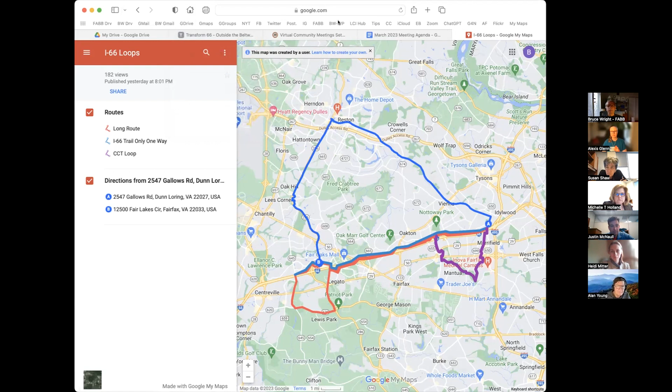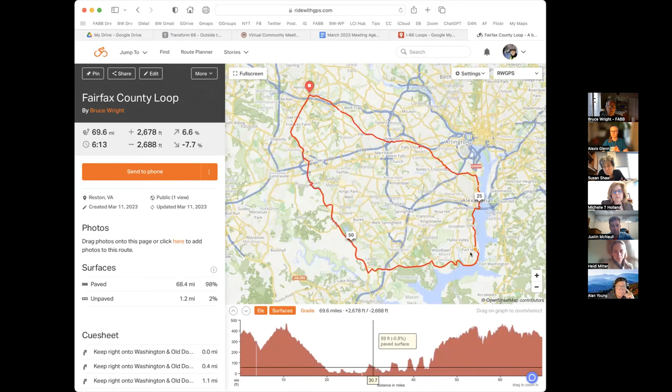Let me get back to my agenda here. The bigger 70-mile loop that includes the Mount Vernon Memorial Highway trail, when that opens, covers this segment right down here up to Route 1. That's going to include Route 1, Lorton Road up to Route 123, up to Fairfax County Parkway, up to the W&OD Trail, the 4-mile run trail, and I think part of the Custis - no, I don't think it does the Custis - and then down to the Mount Vernon Trail. So these are critical links that are being finished off. Anyway, those are coming.

Fairfax County is also conducting the Gallows Road corridor multimodal study, and we've got a couple of folks from FABB looking into that. Gallows Road is a key north-south link that is just not bike friendly, especially across the Beltway near Inova. We hope there will be a bridge over 495 along Route 50 that'll connect with Gallows Road, and then that whole Gallows Road corridor needs to be more bike friendly. So with that, let's go right ahead with the I-66 parallel trail presentation. Susan Shaw is the Megaprojects director.

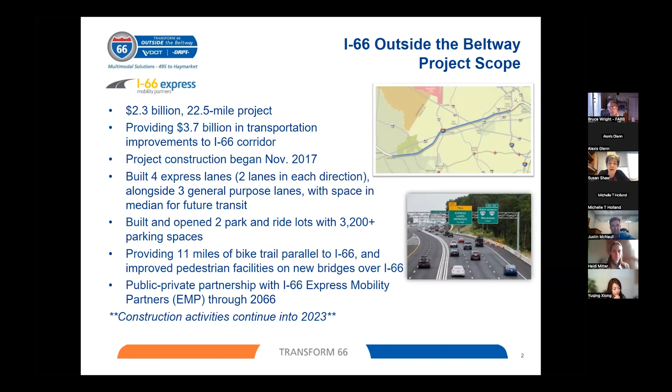In terms of the shared use path, on the next slide, that's our big map of what we've been doing. 11 miles of trail that we're building, and you might recall that we're partnering with various groups along the corridor to implement some elements of these trails where the right-of-way was constrained, or there were constraints immediately adjacent to the corridor.

We are anticipating kind of a segmental opening. So as safe, usable segments of the trail are completed, we'll be looking to open those and make them available. And in addition to the trails along 66, we also have improved pedestrian facilities on the new bridges that have been constructed as part of the project.

Susan, I just rode from Merrifield to get back here and noticed that the Cedar Lane trail is paved on either side. It was just really rough rock. So that was fantastic to see that. Now the county just needs to pave the rest of that up to Cottage, but good job there. Good. Yes, I mean, we'll hope to just keep ticking off more of those as we move along.

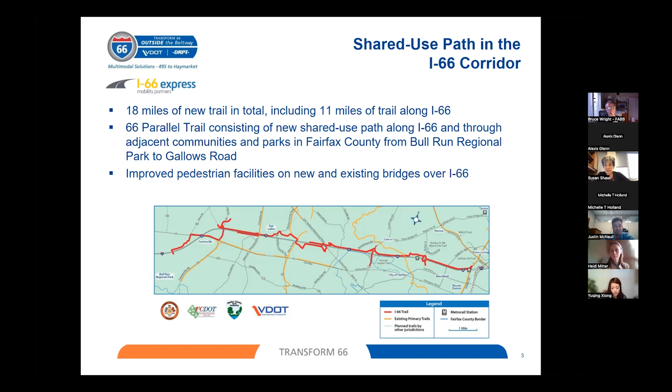So some of these are being, and you'll see on the next slide, Bruce and I are covering what is being included with the Transform 66 project proper. And then Heidi is going to cover some of those projects that are being delivered either outside of the project by VDOT or by others. I think Yuqing has some information too about areas where the county or Fairfax County Parks are doing some elements of the trails. And so you can just see that these are the main sections that are being done within the project, all the interchanges, the sections that we'll cover.

We also have a piece along Fair Lakes Circle that's still being worked on, an area of Compton Road that passes under 66 on the west end of the corridor, and then some trails along Braddock Walney Road and into the EC Lawrence Park entrance there.

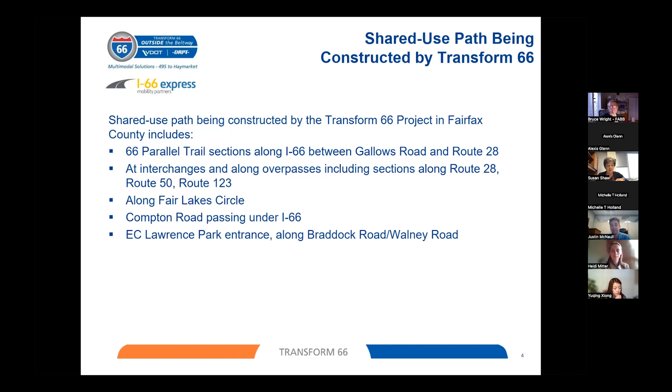So with that, I think I'm going to turn it over to Bruce, and he's basically going to start at the east end of the corridor, and we're going to work our way west. We'll talk about what we're anticipating to open. We split this into what would be available by mid-May opening, and what's after mid-May. As elements are usable and safe segments are available, we're going to open them, so you may see some stuff opening before May. That's what we currently anticipate, but that's how we split it up for this presentation.

Thanks, Susan. So as Susan mentioned, the next 12 or 13 slides are really kind of walking through the corridor that's part of the 66 parallel trail. We've color coded it: the elements in green are expected to be open by May 19th, the Bike to Work Day, and the orange are items where we're still working on different things that may delay that. The dashed lines are sections outside of the 66 project - that would be existing facilities already out there, other projects being worked on, which Heidi and Yuqing may go into more detail on later, and then future connections that will be built later on.

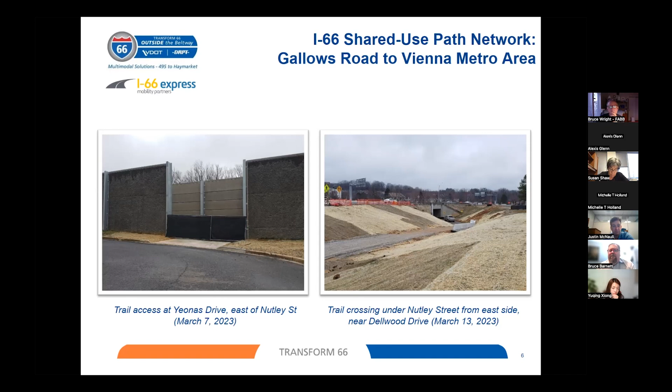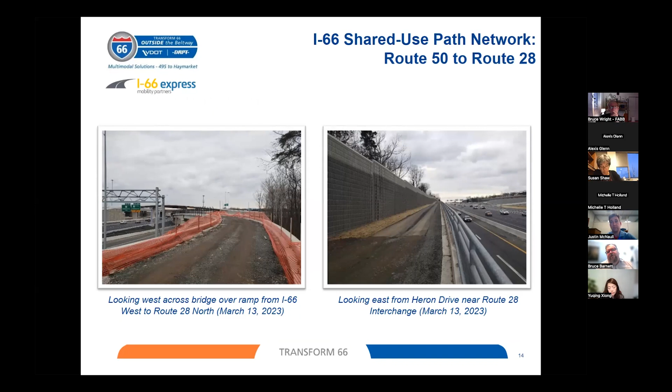If you go straight, you would continue on to the Braddock Walney Trail. If you go to the right at the split, you would cycle around and loop back up and over top of 66 to be able to go south towards 29. Again, it's all grade separated.

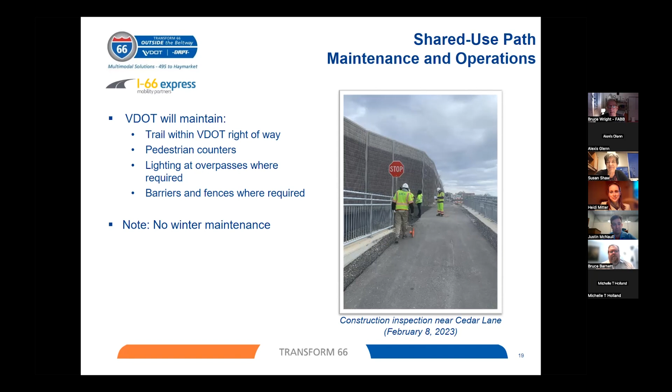All right, and let's see, the next slide is on the non-motorized traffic counters, and those are the locations that we've identified. And so that will provide information that, I guess, this will go to Heidi.

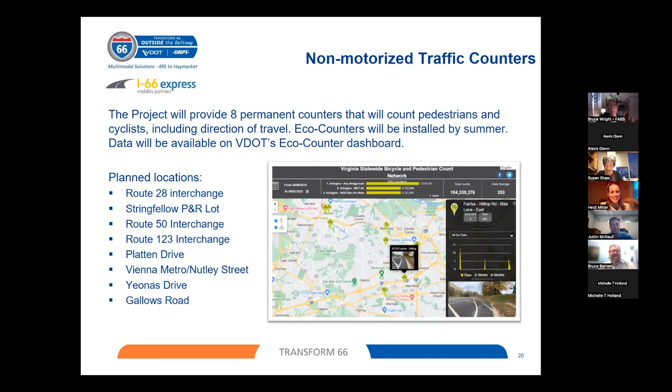So, and I don't know what she'll do with it, but we will know how many people are out there. And so with that, I think I'm going to turn it over to...

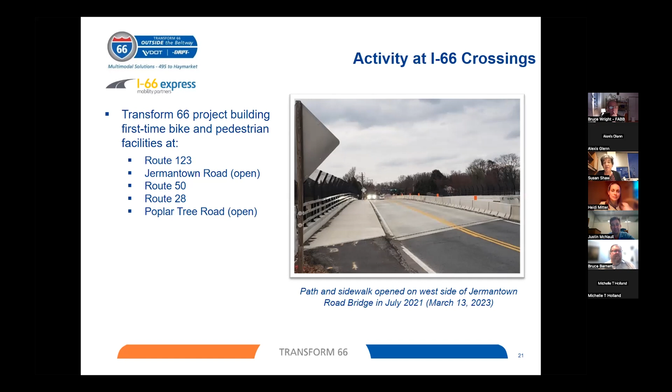This is just that we're having some new facilities. Some of those are already open. And then there's some that we're still working on getting open. And now I'm going to turn it over to, one last one.

So what are the steps? I mean, you could see the state of construction out there. It varies, but we are working to get complete paving. Much of it is paved. I mean, I know the weather's getting nice. People are just starting to use the trail.

I've seen that a few places, whether it's cordoned off or not. But we do need to get lighting in those crossings, in the culvert crossings. We're working on the sign installation, and signs associated with the trail itself. And we've been doing some safety walks that include our trails people as well, making sure we haven't overlooked anything.

Any concerns out there prior to opening. So, as we said, we're looking forward to getting some segments open. Probably, I think there's a couple segments in April, around from Cedar Lane to Nutley Street, and then Blake Lane to Route 123. And then we're just going to keep working to open segments as they are ready and get through this process.

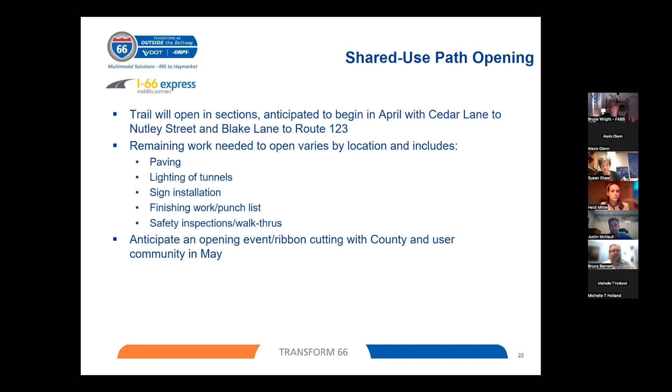Thank you, Susan. I didn't mean to rush you there. I'm sorry. That's all right. That's all right. All right.

Now I'm turning it to Heidi. Okay, thanks. Thank you, Susan and Bruce. So I'm going to highlight 3 to 4 projects that are the delivered by others projects.

These are, as Bruce mentioned, in the 66 parallel trail alignment. This is not meant to be a thorough overview. Each of these projects has had their own design public hearings in the past year or two, and they each have a project website with extensive information, which I can provide the links to. So this is just briefly.

The Vienna Metro Station Bicycle and Pedestrian Project is the segment between Blake Lane and near the Nutley interchange at the top entrance of the Vienna Metro Station. This project is essentially 2 projects, an ultimate project that I'll discuss on the next slide, and an interim project, which was envisioned as a quick build and consists of a shared lane.

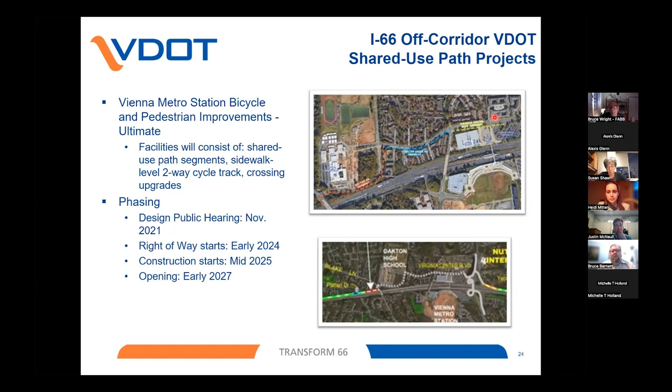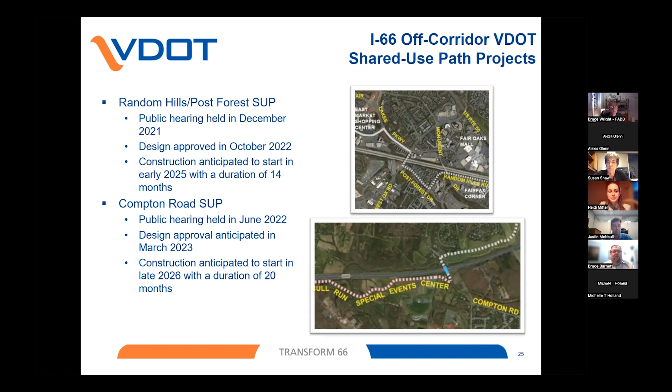That should be the extent of my update.

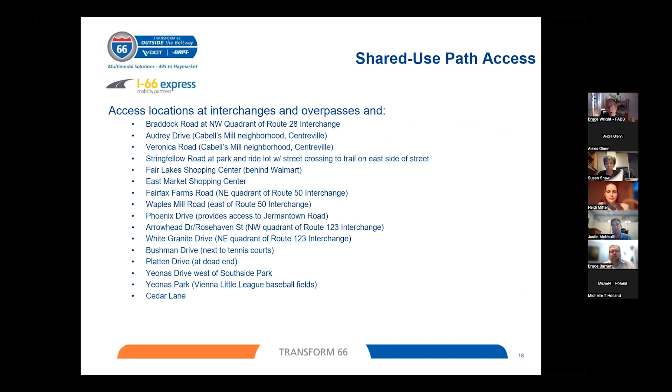Before we get into other questions, I have a quick one regarding Random Hills Park. So when the I-66 trail comes down to connect to Random Hills, there's that little park, and I think there is a small segment of old trail there, but do you know what the status of that is,

and will there be an interim connection there? I think that's Park Authority property. Yes, I will pass that to Yu Ching with Fairfax County to answer. Thank you, Heidi. Actually, our project manager for this project from the county, Will Stainhill, he just joined the meeting also. So Will, do you want to speak up for the most recent update?

Sure, I could talk about the Park Authority piece here. So you guys are correct, there is a piece of existing trail there. Unfortunately, that doesn't quite meet the standards that we're building the trail to right now, and it does not provide the connectivity that we're looking to provide with the Park Trail project.

So the Park Trail project will run along Random Hills Park Trail. And what's not really shown very well here is it's kind of going to snake around in an S-curve because we have to avoid a lot of sensitive wetland areas. This is a low-lying area, so part of the reason why this section of the project is lagging behind is because we needed to make some design adjustments in order to not negatively impact that wetland area in the park there.

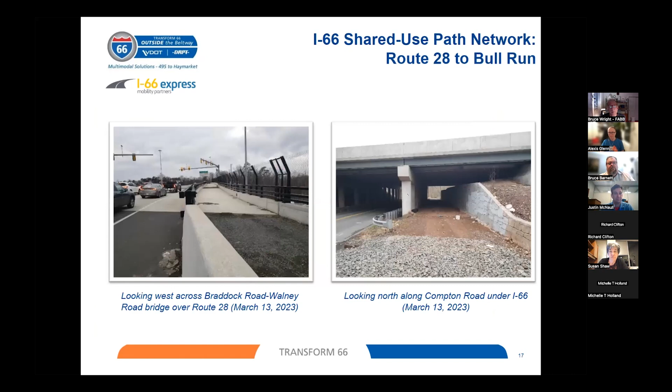So are you referring to the trail at Stone Road going through the Park Authority parkland? I see a dotted line from Newton Patent Drive that goes through Cub Run—come down a little bit west. I was thinking over there. Yeah, that's...

That's a trail segment the county is still looking at. We're currently trying to finalize the alignment and also the funding. So at this point there's no plan yet, but we'll update the public when we have one—we're still finalizing the concept there. Is there a general timeframe in mind, or is it open-ended? At this moment it's open-ended because there's a bit of a challenge going through the land with some restrictions and landscaping there. So we're still looking at different options, and there's no real schedule at this moment.

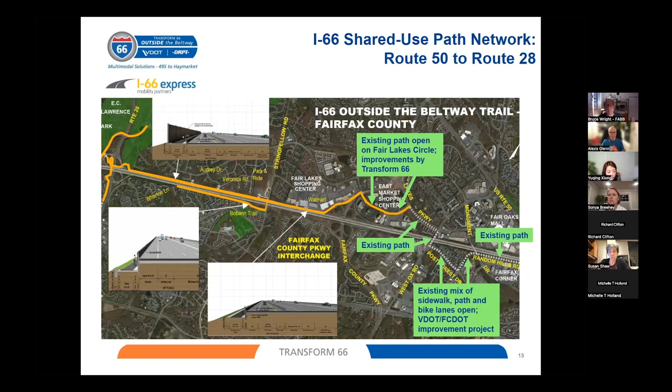Alexis, do you want to handle Chris's question? Chris French—sure, another question on Vaden: when will the sidewalk on the west side of the bridge be reopened? This is the side of the bridge with the hot lane ramps. We're not far from being able to do that. I know we have some issues with pedestrian signals; beyond that, I don't know of a reason why we can't get it reopened.

But I need to verify that. I don't think there's any other construction activity—I think the ped signals are the only issue, and we have a fix for that. We could have that open very soon. I will make a note to push on that. Great, thanks.

In that same vein, where will we be able to check if other portions of the trail have opened? We'll get with Michelle, and maybe find some kind of landing spot on our project website where we could provide updates, and make sure FABB is aware so you guys can push out the status as new segments are opened. Okay, great.

Looks like Heidi may have just answered Bethany's question, but I'll mention it here: you mentioned earlier there's an at-grade intersection on the 66 trail—she thinks at 29—with express lane access. Will there be a signal there or any other way to protect cyclists and pedestrians? I think Bruce mentioned this at the 123 interchange. Yeah, Bruce, you said there would be a signal there. Yes, that's correct.

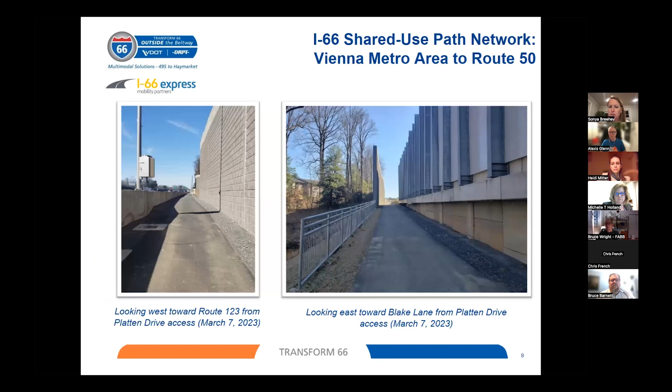I believe the trail runs along Newton Patent Drive in Centreville, if I'm not mistaken. And I was curious if there were plans to improve the facilities to have a trail along that road, or if it were just going to be expected to be on road. It's the pink part up top right of that slide.

Yep. So right now I think it's just a regular neighborhood road, which is probably low volume, but was there going to be plans to actually create a trail in that segment?

That's one of Fairfax County's kind of future unfunded segments. So perhaps Yuqing has a response to that. No, Heidi, you're right. So at the moment, there's no plan to upgrade that one since we decided to...

change the plan a little bit at the beginning of the project to use the existing path, upgrade the existing path going through Route 28 and Route 29, as you can see there. So more users can use the facility. So the Newton Patent Drive at the moment, we don't have a plan to upgrade that one.

So that's going to be the interim solution, or probably the solution for a while, is to use those two existing trails that you mentioned.

Okay. But is there an existing path through the neighborhood? I guess there's part. That's just along 29, right? But if you were cutting down towards the Cub Run Trail segment.

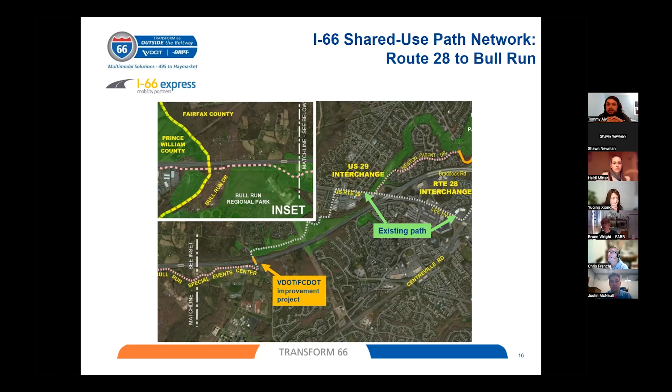My questions regard connectivity to other trails. I guess probably one main thing is connection via Gallows Road to the W&OD trail. I guess right now Gallows Road does have bike lanes. However, they are on street and unprotected, and I guess not the most pleasant or safe to utilize.

And I'm wondering, are there plans to improve, I guess, things like Gallows Road, or yeah, like for example, Gallows Road. I know that's technically outside of the jurisdiction of, I guess, this meeting, for example.

Are there any plans to change Gallows Road between the W&OD and the I-66 trail? If I could interject, there is a study going on looking at that whole section of Gallows Road and what needs to happen in the future, but that's pretty much long range.

Heidi, do you have any thoughts about whether any short-term plans are in the works? Well, there is a shared use path along Gallows, so I guess that is the intended connecting facility. I'm aware of that study, and my colleagues and I are providing input on it. I don't know of other improvements planned in the immediate term besides using that shared use path.

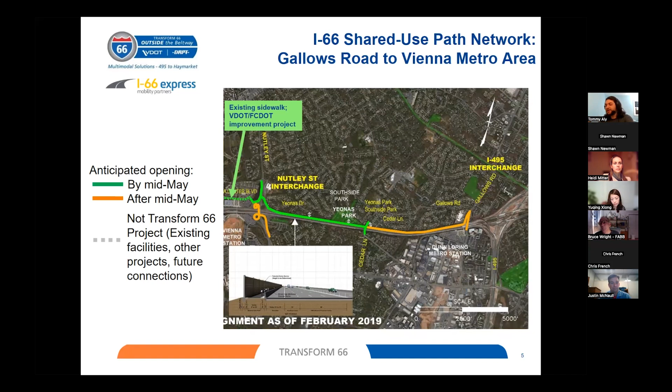Also, regarding kind of the hole that we have, I think before Vaden Drive, where there's a hole in the area near the Vienna Metro station, there's a section where it's the temporary area where we have specifically the shared lane portion. Sutton Road, probably. Yes.

From what I've experienced biking with friends or family, they tend to steer clear of something even if it has a sharrow—it's often not very comfortable for them. I actually biked along Sutton Road all the way over to Nutley, and I was wondering, it seems there's enough width that there could be just a standard bike lane implemented.

Are there reasons why a sharrow was decided upon instead of a proper bike lane, or even better, a bike lane with little plastic bollards or protection? Because I often think, would you expect a 5-year-old child to try to navigate using it?

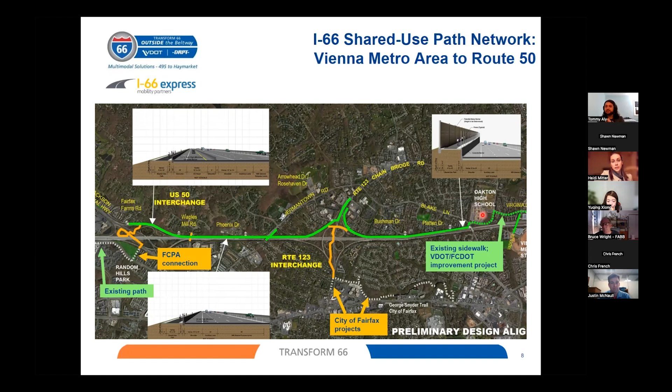So that is on Sutton Road, and it is for only a portion of Sutton Road. There will be buffered bike lanes that do start on Sutton Road. I know it's a little grainy, but the image shows the yellow portion that will be shared, and then buffered bike lanes will start later down Sutton Road. It was too constrained to have bike lanes, even basic bike lanes, because those need about 5 feet on each side, so 10 feet of width at least, and that just wasn't present, at least for a quick build scenario.

We weren't able to move any curbs or dig up any land, because that is a different level of construction. But there will be signage and pavement markings, and there's also a comprehensive safety study going on for Blake Lane that includes the intersection with Sutton. So it's not ideal, we acknowledge that, but in order to get something down in the very short term, that was what was possible.

All right, thanks, Heidi. Shawn, you have a question.

Hey, good evening, everybody. So I actually had a question that's definitely outside the scope of this conversation, and I understand that, but I'm going to ask it anyway. During the recent legislative session, Virginia DOT expressed opposition to a couple of bills, and I wanted to bring these to your attention, understanding you may not have direct influence, but anyone I can talk to in VDOT would be great.

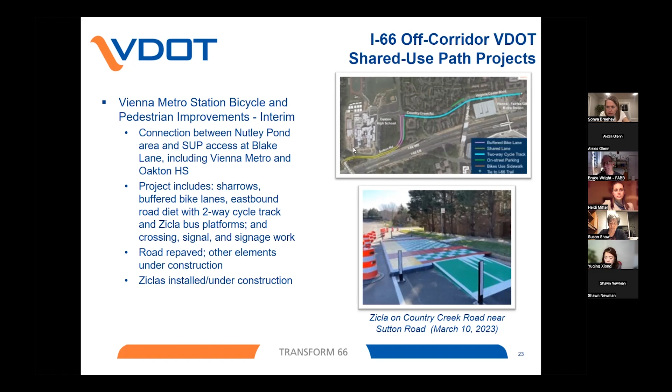So great, thank you. Well, with that, I think we've answered most of the questions or addressed most of the questions. Again, I want to thank Susan, Bruce, Heidi, Justin, Yuqing for your update. As I said, we're really looking forward to this, and it's a great project. So thanks again. Any final announcements or comments that anyone has?